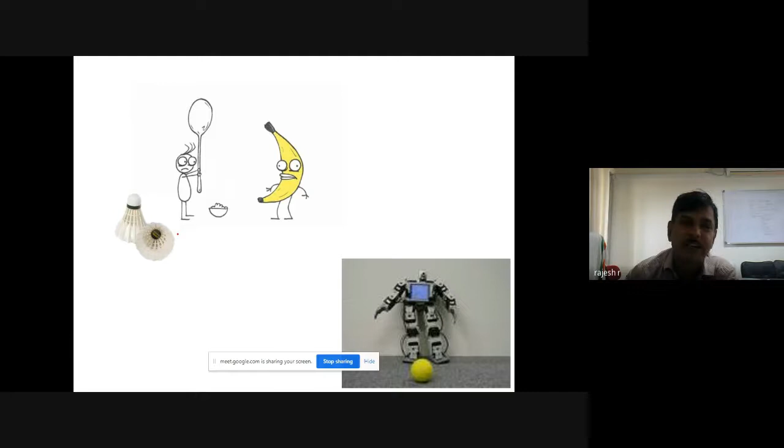Now, in depth, if you see the need and necessity of fuzzy logic systems: in earlier days, we used to say that the data is being processed, and we called it data processing. And the computer is usually named a data processing machine, to convert data to information. Later, when we thought that information is not sufficient for human beings and we want to process the information as it is, something called information processing, all the research comes here. All the uncertainty, vagueness, ambiguity, everything comes here. And it is very difficult to convert information to knowledge.

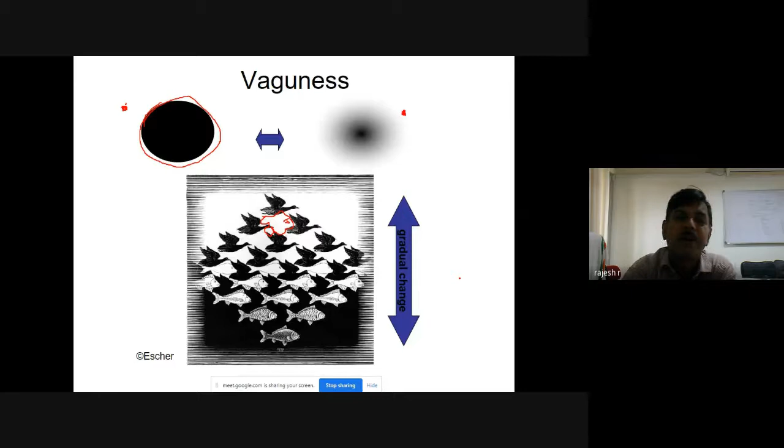So there is uncertainty, vagueness, and ambiguity in the picture, which makes us think about the need and necessity of something called a representation capability, especially for the purpose of computational intelligence systems. And there are several examples we would like to give.

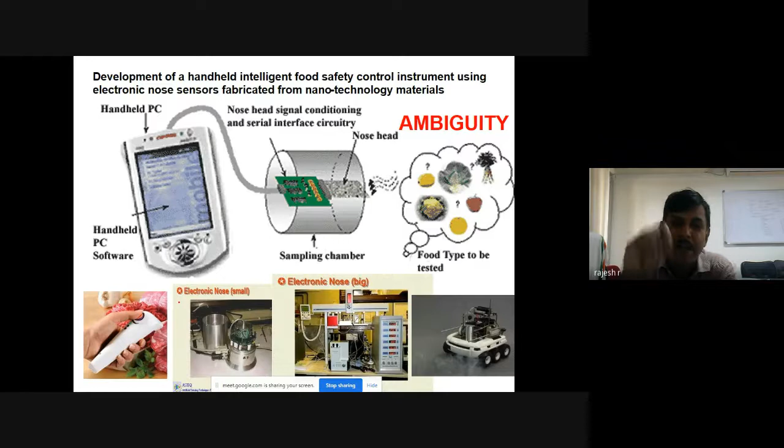There are electronic noses, which will try to smell food items, right? There we will be able to smell whether the meat is fresh or 1 day old. There are small electronic noses and big electronic noses; these are all electronic devices. They will provide signals, and these signals have to be interpreted properly. All these signals will have uncertainty, ambiguity, and vagueness, right?

Similarly, the computer tongue is a small electronic device. It is able to taste 1,000 different flavors, developed by the University of Texas. Still, it's an electronic device giving signals, and these signals have to be interpreted properly. So these things you have to keep in mind.

And similar is the case for the smell printer, which will print the smell based on whatever you see on the screen. The printer will open 1 or 2 jars. For example, it will open the smell of pizza, and it will have a fan that will project the smell, so that you will feel that smell when you see something on the screen.

There comes the real need and necessity of a fuzzy logic system for representing uncertainty, vagueness, and ambiguity. There are other representation capabilities, as I already mentioned, like rough sets, probability theory and so on. Fuzzy logic has a different way of handling uncertainty, ambiguity, and vagueness. That is why fuzzy logic has become an industrial standard.

So in the previous slides, I was trying to explain to you the need and necessity of fuzzy logic systems. As I already explained to you, it is part of computational intelligence, one of the three major components, that is learning capability, optimization capability, and representation capability of the computational intelligence system. Now we will see when fuzzy logic attracted the world.

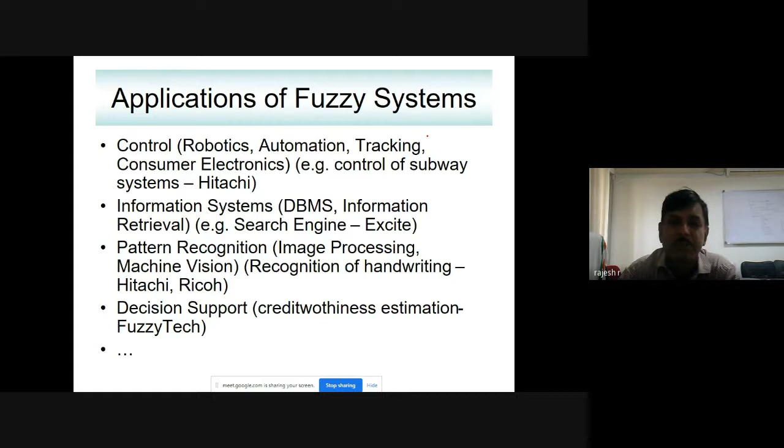And there are a lot of applications of fuzzy systems. Even if you go to Google and search for applications of fuzzy systems, you can see n number of them: control systems, information systems, pattern recognition, decision support. Even fuzzy cookers, rice cookers, washing machines, cameras which are able to capture images from a long distance. Those types of cameras also come with a fuzzy logic chip embedded inside.

Now, slowly coming to the mathematics behind fuzzy sets, that is most important to understand. There is a lot of mathematical study in fuzzy sets. Like classical set theory, a lot of books on fuzzy set theory have come out. Even Zadeh has written several books on fuzzy sets. As far as the fuzzy inference system is concerned, a small part of fuzzy set theory is most important to understand, so that we can clearly implement the mathematics behind the fuzzy inference system. So we will slowly go into classical logic, so that we understand how it is different from fuzzy sets.

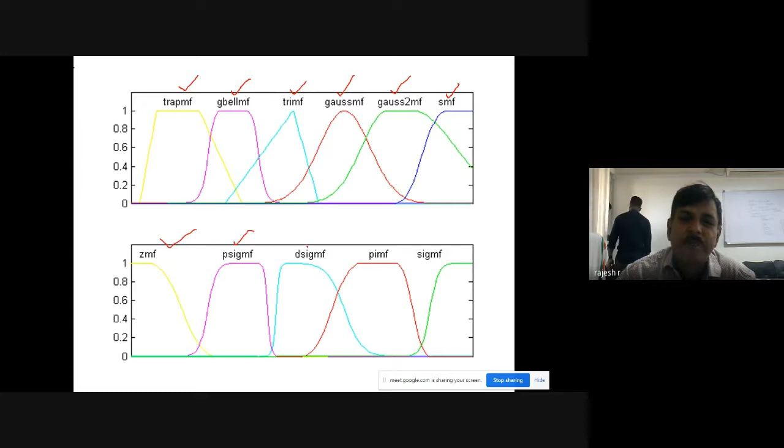Now think about various other types of membership functions available in fuzzy logic. You can have trapezoidal membership function, G-bell membership function, triangular membership function, Gaussian membership function, gauss2mf, SMF, ZMF, psigmf, dsigmf, pimf, sigmf, like that. So all these membership functions will have their own functions. Even if you Google search, you will be able to find out the mathematical equations governing all these things.

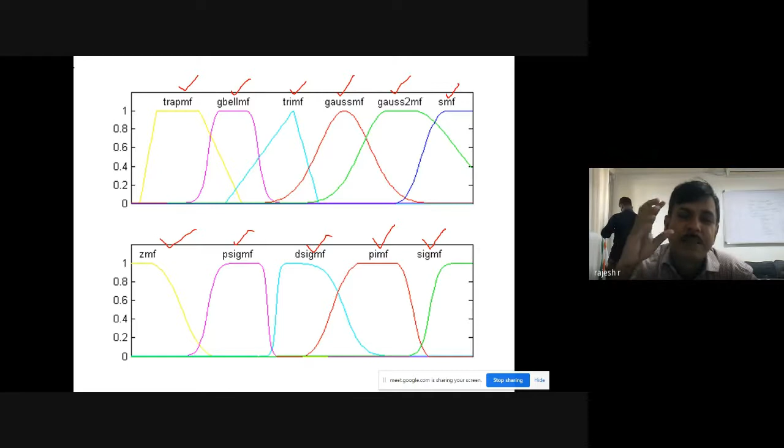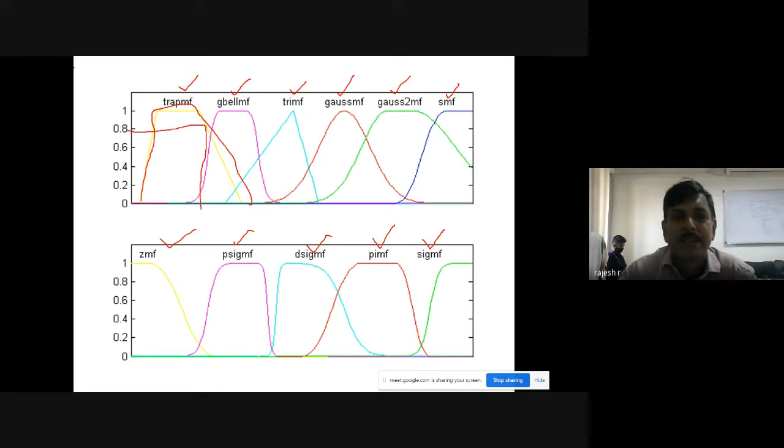It means that if you say a membership function, automatically your mind should come that there is a mathematical equation governing that. So any value when you give to that function, automatically it will give a grade. For example, if you are fixing a trapezoidal membership function somewhat here, and your current value is coming here, then automatically it will give a grade something like this, when it touches this particular portion. So you define a function. Whenever you pass that particular value to that function, it will give a grade. That is how the function is being written.

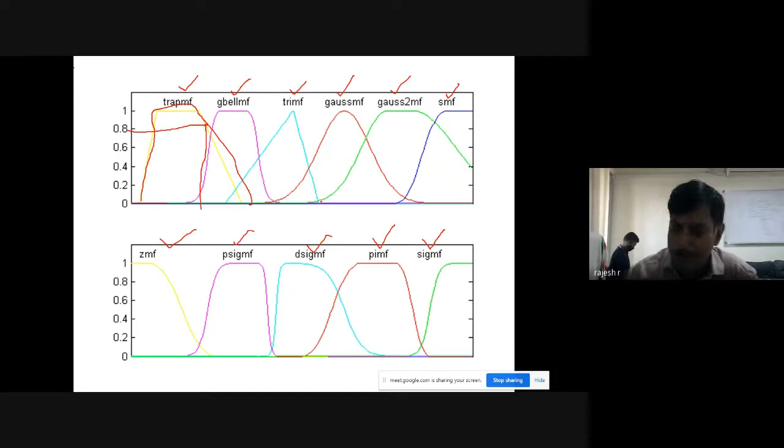So you should remember that. There are a lot of fuzzy set operations available. If you take any fuzzy set theory books, you can see a lot of logics, like classical set theory you have union, intersection, and all these things. Similarly here also you have all such types of things.

But rather than going deeply into all other things, we want to implement the fuzzy inference system. So whatever is needed for the fuzzy inference system, only that we are going to discuss in this slide. So we will see union.

Union in fuzzy set theory has been defined by multiple scientists. One of the scientists says that union can be defined in terms of the maximum of the set containing mu A of x, comma mu B of x. So it says that if you want to take a union, you take the maximum of the set containing mu A of x, comma mu B of x.

Similarly, another scientist has come up with an explanation telling that the union is nothing but a set of minimum of the set consisting of one, and the summation of both these things, mu A of x plus mu B of x.

Similarly, when you see the intersection, one of the scientists says that it is the minimum of the set containing mu A of x, comma mu B of x. Another person has come up with the explanation that it is nothing but a product of mu A of x into mu B of x.

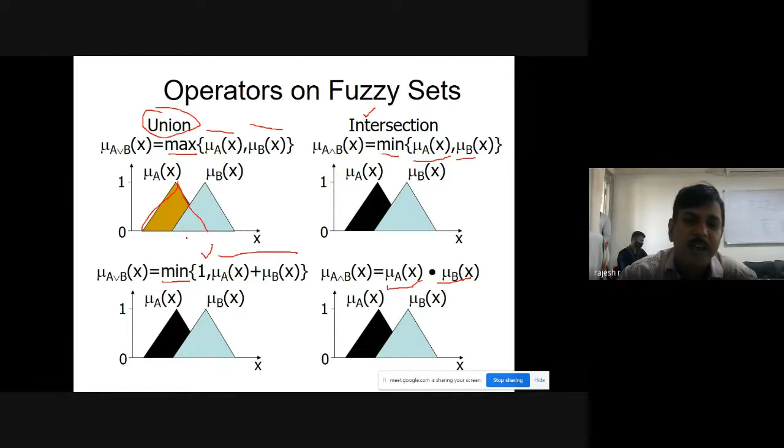So we will see a small visual thing. For example, this is the membership function A positioned here, and this is another membership function B positioned here. If we use this particular thing and try to find out the union, what will be the value? The entire thing will become red. And similarly, if you use this minimum, what will happen? That also we will see. So here you have a gap in these regions, but here you don't have a gap, the entire thing has become red.

Similarly, in the case of intersection with this minimum, we will see what will be the result. And similarly, if you do the product, you can see the smallest portion, which is being highlighted. So depending upon the type of union and intersection operations that you are using, you will be able to understand how to find out the maximum and the minimum.

So there are other set operations also available. These are only two examples: one is called union operation, and another is called intersection operation. These union and intersection operations are very important as part of the fuzzy inference system. That is what I am showing you.

One more time I will show you this thing so that you will be able to understand. So in the case of maximum, the red portion which is highlighted is the union. And in the case of union using minimum, you can see this portion. In the case of intersection with minimum, you can see this portion which you are getting. And in the case of intersection using product, you are able to see this highlighted region. So this is what you will be able to see based on union and intersection. Any doubts so far? You will be able to discuss it.

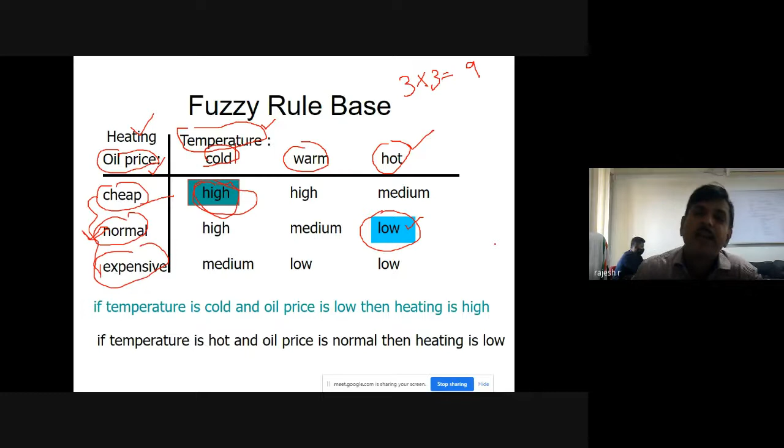This is very important to understand: how we will mathematically write a fuzzy rule based on the fuzzy variables. In the fuzzy inference system, if you look inside, there are four components available. One is called the fuzzifier. The fuzzifier is the part where you convert all the numerical values into fuzzy values, fuzzy labels or fuzzy sets. All the numerical values automatically get converted to fuzzy.

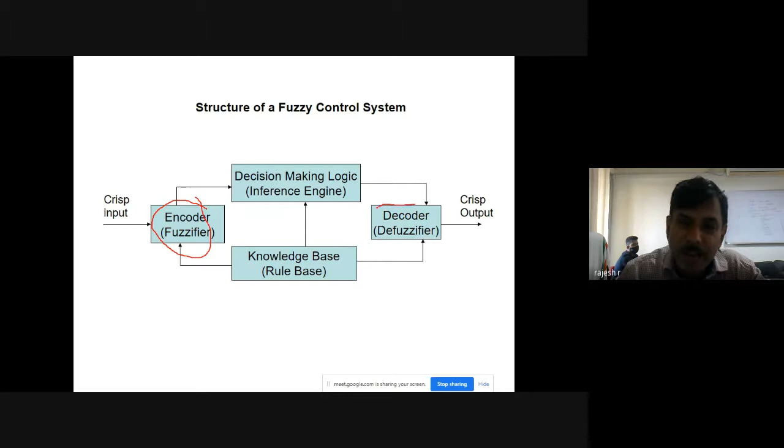The defuzzifier is the part where all the non-numerical values become numerical. So once you fuzzify it, the fuzzy values will come here. There will be a set of rules, which we call the inference engine. This inference engine, by taking the rules available in the rule base, makes a decision.

Assume that you have two different judges making two different decisions, and finally three different judges for seeing a drama, and they make a judgment, and finally you consolidate and rank it. Similarly, you will have different types of rules. Each of the rules will fire a certain answer, and that answer will finally convert to make a decision.

That decision, whatever comes here, again will be linguistic type. You have to convert it into a numerical value. For that, you need a defuzzifier that converts the non-numerical or fuzzy value into a numerical value, so that you can directly apply it to any system. That is how the entire fuzzy inference system works.

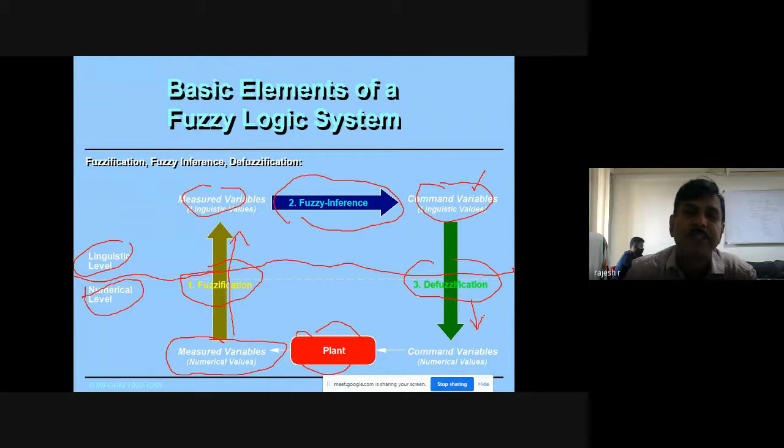Each rule is of the if-then condition type, right? And each variable that you are having will have a set of membership functions. Membership functions are defined in terms of mathematical equations, as you have already seen. Now, how does the firing happen? You will see certain examples so that you can clearly understand it.

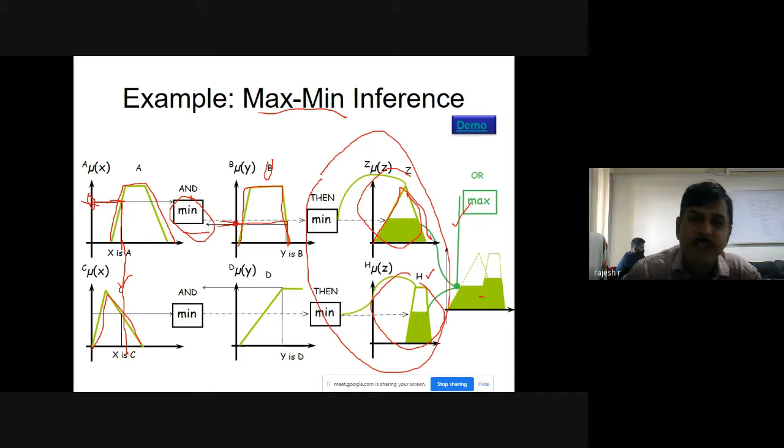So there are different types of fuzzy rules. One is called the Mamdani type of rule. A scientist called Mamdani came up with a mechanism to make fuzzy rules where the consequent will be membership functions. The consequent part is the then part. But there are other scientists, Takagi and Sugeno, who came up with a mechanism of having a linear combination of the input variables as the output. That is called the Takagi-Sugeno fuzzy inference system.

So here, since the output value is in terms of a linear combination of the input variables, the defuzzification part is very, very simple. In the earlier case, since it's a complex area, the defuzzification becomes very difficult. But here, the defuzzification is very, very easy.

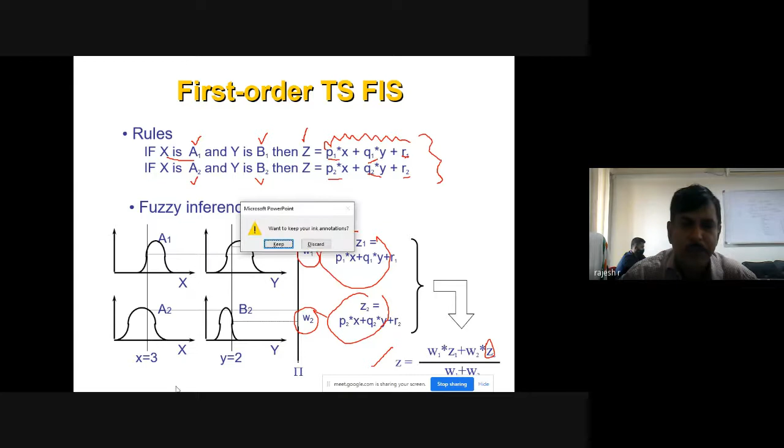so that you will be able to understand it very clearly. I think you are able to see my screen. Are you able to see my screen? Yes. Yes, sir. Yeah, okay.

So this is MATLAB, where I am going to show you an example of how to create a fuzzy inference system. So I am just typing fuzzy here. There is a fuzzy GUI available with which you can create fuzzy rules. So just type fuzzy. You will get a fuzzy GUI where you have input variables as well as output variables.

We will take the example of a doctor. We want to make a doctor who will be able to prescribe paracetamol. And the input variables will be temperature in Fahrenheit, and cold, how much cold you are having.

And the output will be how many grams of paracetamol you want to eat. So let us say that we want to have two input variables. Currently only one input variable is available here.

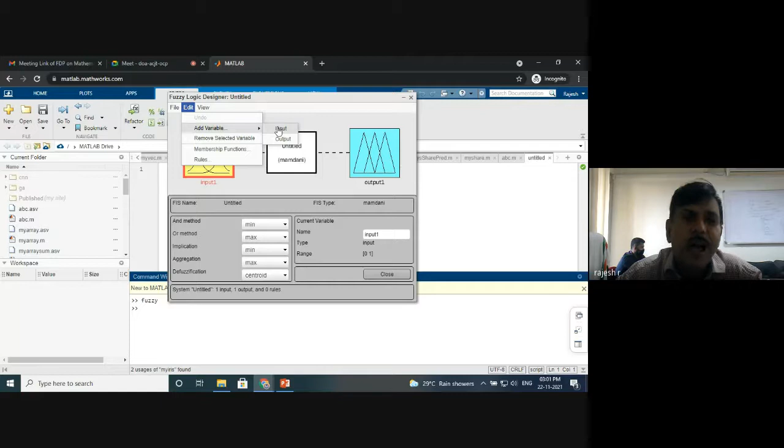There is an option to add. You click on edit. Once you click on edit, you have add variable. And once you click on add variable, you have an option called input, right? So everybody, I think you are able to see it. Inside edit, there is something called add variable, and inside add variable, you have something called input.

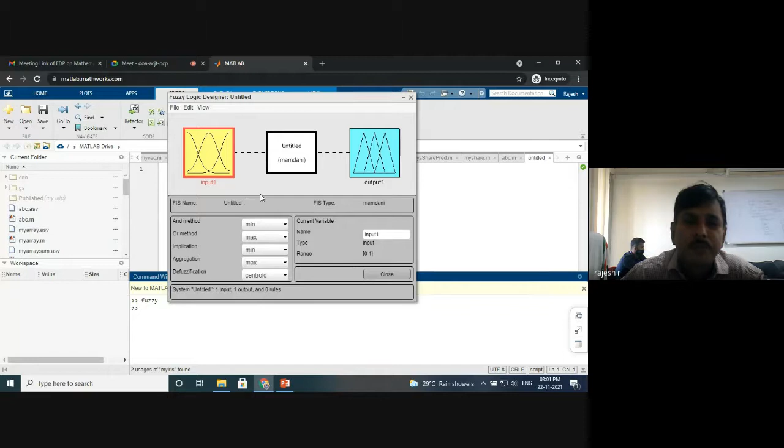You click on that particular input, and automatically you will be able to see that you have two input variables here, right? First one here and second one here, and we can name them. For example, you click on the first input variable. Here you can see the name of the current variable. You can change the name of the current variable to temperature.

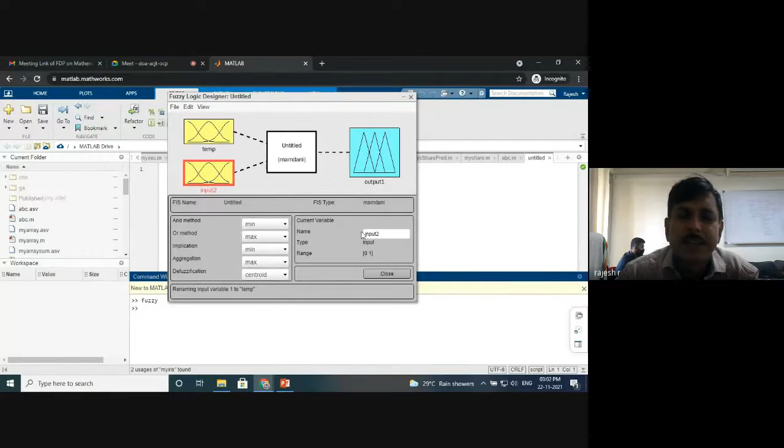When you click somewhere else, automatically you can see that temperature will appear at the bottom of the first input variable. The second input variable, I am going to name it. You just click it, change the name to cold, and click somewhere else, and you will see that the name of the second input variable has been changed to cold.

The output variable, you click it there and change the name to paracetamol, for example, PAR, and click somewhere else. You'll be able to see that paracetamol has appeared at the bottom of that particular variable. Now it is our duty to create regions, right, and assign membership functions for each of these regions.

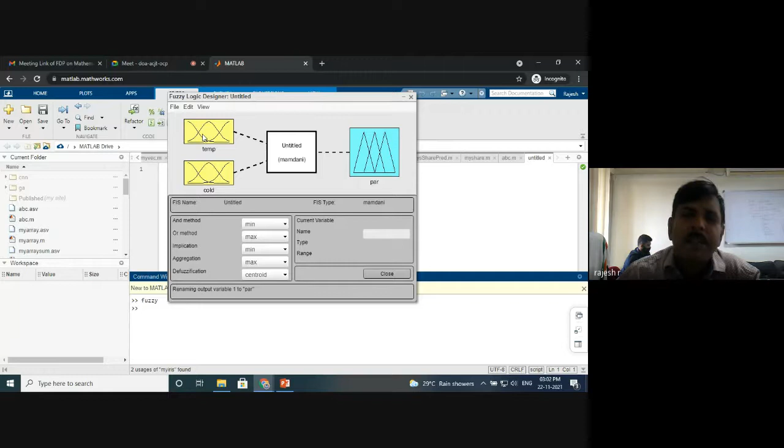So you just double click on temperature. You will get another screen where you can create membership functions. By default, you can see 3 membership functions. You can delete these default membership functions. For example, click on this and press delete, click on this and press delete. You can see the domain is from 0 to 1.

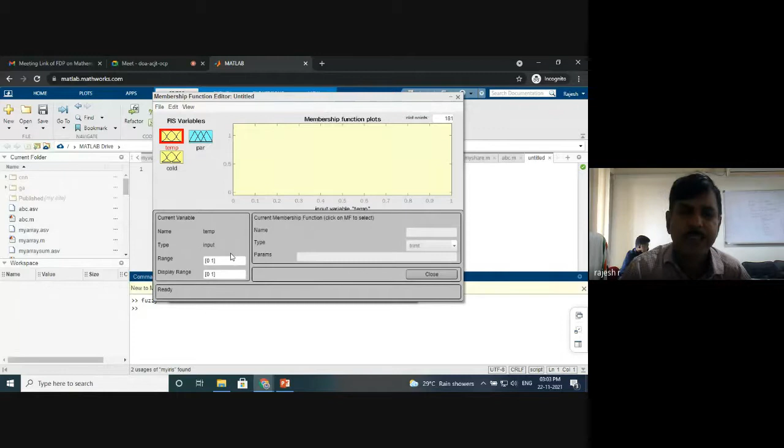But in the case of temperature in Fahrenheit, we want 99 to 104. So change the range. In the range I am going to give the value 99, and instead of 1, I am going to give 104. Once I click somewhere, you will see that the range and display range have automatically changed to 99 to 104 Fahrenheit.

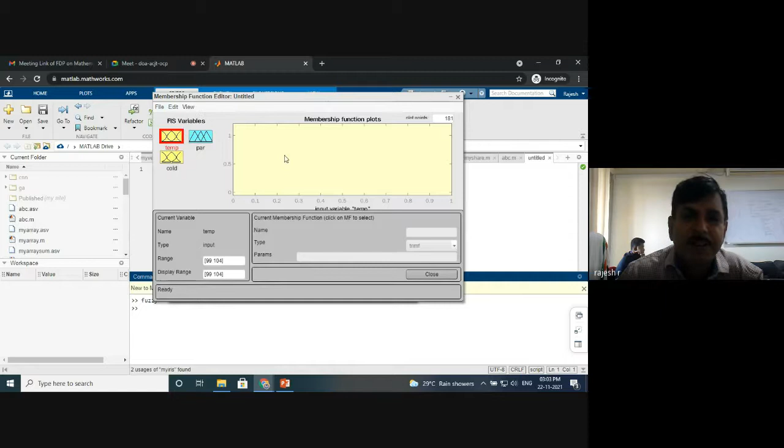Now I want to make regions. How many regions do I want to make? So you click on edit. There you can see add membership function. Once you click on add membership function, you will see another screen, right? This screen shows what types of membership functions you want to use.

You can use triangular membership function, trapezoidal membership function, Gaussian membership function, anything. Assume that we click on triangular membership function, and the number of membership functions, the number of regions you want to create from 99 to 104. Suppose I want low temperature, medium temperature, high temperature, that is, only 3 regions. You can click on 3.

Suppose you want very low temperature, low, medium temperature, high temperature, very high temperature. Then you can click on 5. Like that, you can create any number of regions. If I select 5 and press OK, you can see 5 membership functions here, all triangular. If you click on the first membership function, you can change the name to very low, VL. Click on the second membership function and change the name to low, L.

Here you can change the name of the label so that it is easy for you to understand. The third membership function is medium temperature, M. The fourth membership function, you click it and change it to high. The fifth, you click it and make it very high. So you can see that we have changed all the labels: very low, low, medium, high, and very high temperature.

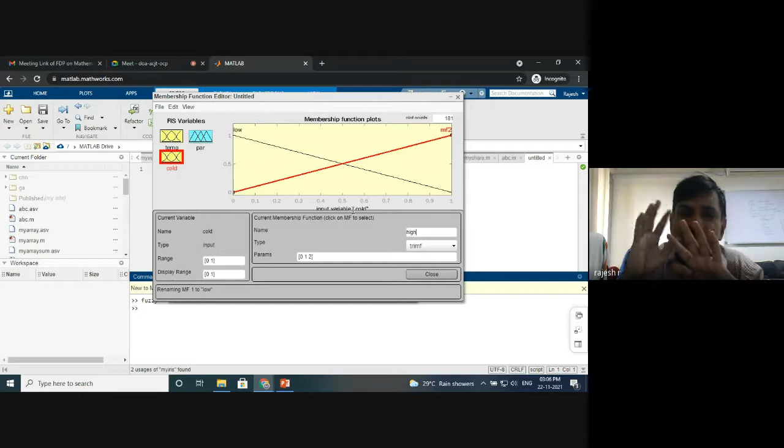Now we have divided the input variables into regions. And for each of the regions, we have assigned the membership functions. And all these things have been defined. For temperature, we have assigned 5 regions. Each of the 5 regions, we have assigned membership functions. The cold, we have divided into 2 regions. Each of the regions, we have given membership functions.

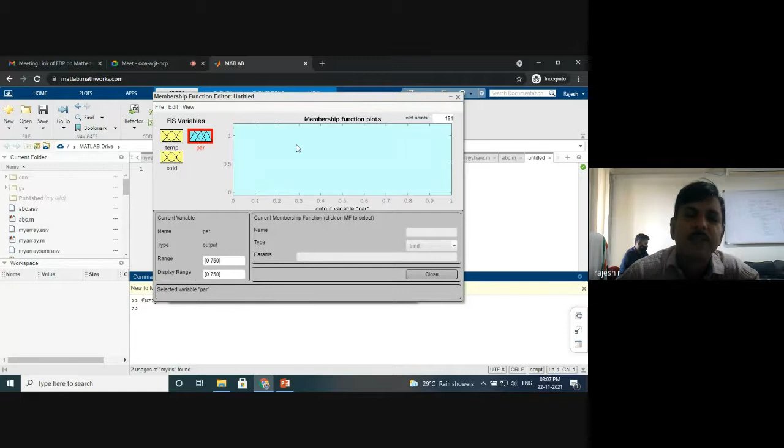Now going to paracetamol. Paracetamol, normally we have starting from 0 paracetamol to say 650, or even up to 750 milligrams we can think about. So you can give the values from 0 to 750, right? Automatically, when you click it and assign some membership functions, you will be able to see the changes here, right? So I am going to add membership functions. So there I am going to have, say, assume 7 membership functions in this paracetamol.

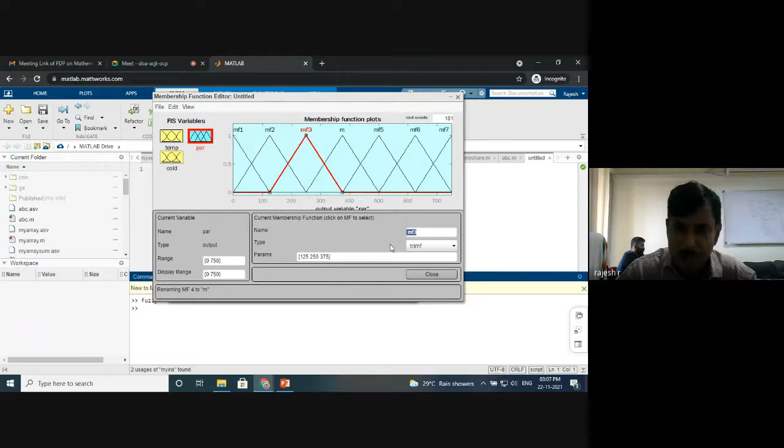For example, this middle one is the medium paracetamol, right? And this one low paracetamol. This is very low paracetamol, and this is very very low paracetamol. Right. Similarly, this side, if you go there, here I am clicking it, I am telling that is high paracetamol. This is very high paracetamol, and this one I am clicking it and changing it as very very high paracetamol.

Right. So now you can see that I have assigned 7 membership functions. They were in 7 regions. Each of the regions I have assigned membership functions, and then we have created all the region splitting. We have assigned the membership function. We have positioned the membership functions. Now all the variables are fuzzy. Temperature is fuzzy, cold is fuzzy, paracetamol is fuzzy. Now we want to create fuzzy rules. The next step is to create fuzzy rules.

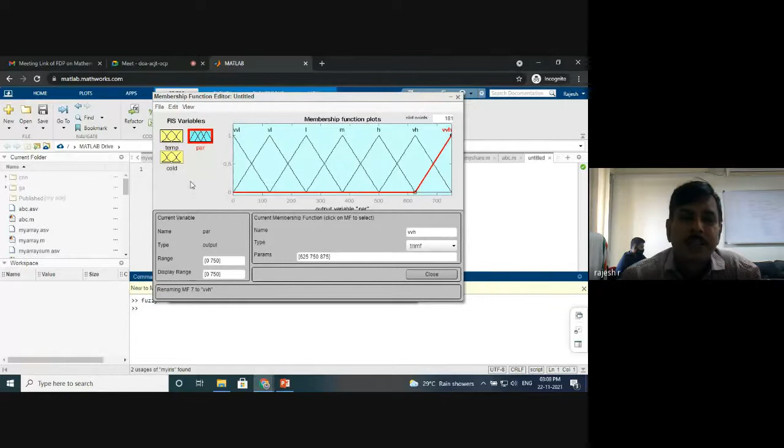Click on edit. Then you have something called rules here, right? You can clearly see that there is a rules. Click on edit. You can see something called rules there. You click on rules, right? Once you click on these rules, you will be able to see a different new window which is coming up,

Similarly, have a high temperature and a high cold. You are going to have very high paracetamol. High temperature and low cold, you are going to have high paracetamol. And we are having medium temperature and high cold. You are having high paracetamol. Medium temperature and low cold, you are going to have medium paracetamol. Like that, you can add rules. Since we are having 5 membership functions for temperature and 2 for cold, you can create up to 10 rules.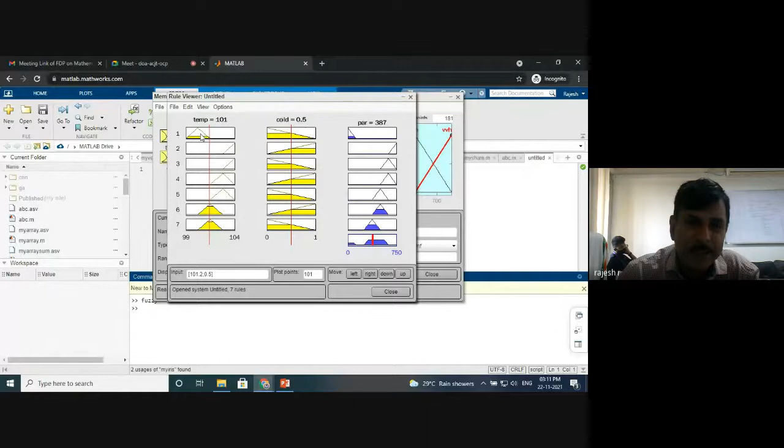So now you can drag this, right? I am dragging this and making the temperature 101 degrees Fahrenheit. And I'm going to say that my cold is somewhere here, right?

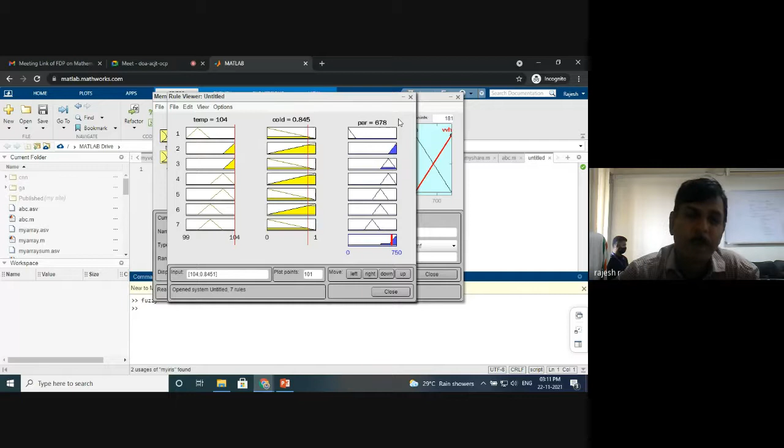Right? And you can see the paracetamol on the top, 387 grams of paracetamol. Right? Each rule fires something. And if I make the temperature very high, right? You can see the paracetamol changes. It has become 678 grams of paracetamol. If cold is also very high, assume that cold is also very high, you can see 711 grams of paracetamol.

If the cold becomes very low, right? You can see here the paracetamol becomes 625, and the temperature also becomes 99 degree Fahrenheit, very low. You can see the paracetamol is 375 grams. So this is how we can design something called a fuzzy inference system.

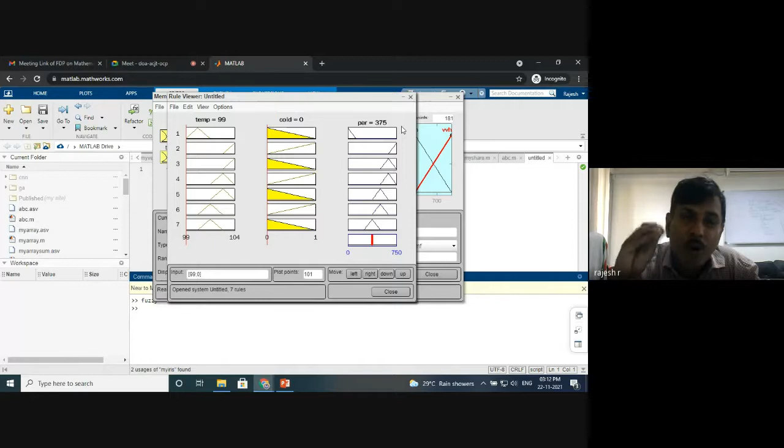This fuzzy inference system is not optimal because we have manually fixed the membership function, and this membership function has to be tuned, has to be optimized based on some machine learning mechanism or nature-inspired algorithms based on some known data available from the doctors. Once you do that optimization, this fuzzy inference system will become optimal so that it can automatically predict how many grams of paracetamol you want to eat rather than eating the entire tablet.

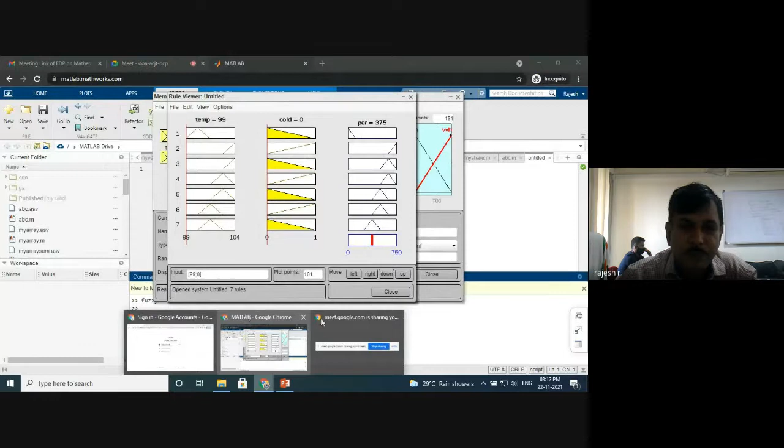I hope that with these few things, I have clearly explained to you the mechanism, the mathematics by which the fuzzy inference system works. I have also given an example of making an automatic doctor for predicting the paracetamol quantity.